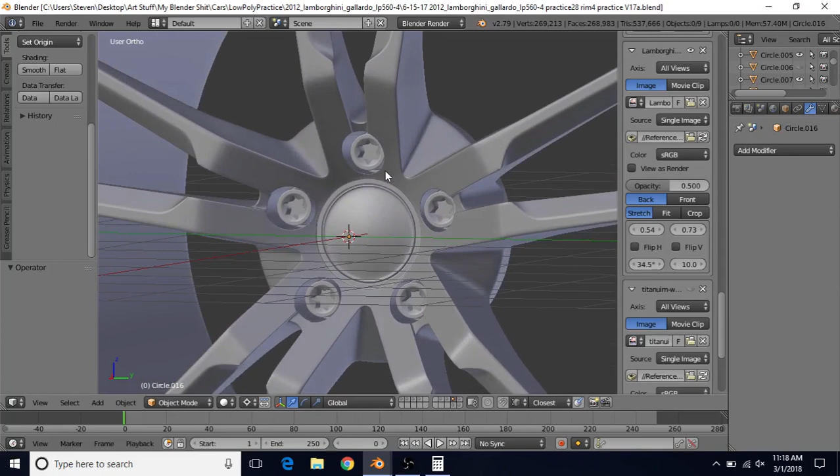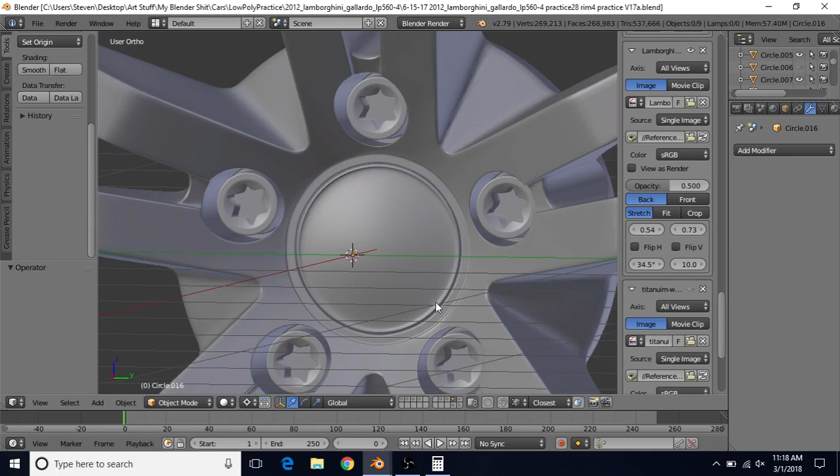We're going to be making the bolts and adding them to our rim just as I've done here. You'll notice that the bolt shape in the center is a bit of a custom shape. I believe this is probably more specific to these Lamborghini bolts, possibly some other cars use similar bolts, but these are an interesting shape you don't see all the time.

So let's take a look at the bolt itself. This is the general bolt shape right here. You'll see a link in the description, or a few links possibly, that show you better angles of what this actually looks like in the real world.

Another interesting thing to be aware of with this bolt is it's actually a two-piece bolt. I believe this is a newer style bolt where this part right here - if I select this part and change it - actually on the real thing is loose. It can slide up and down, and you may see that in some of the pictures as well, showing that this part can move. So these two pieces in the real world are actually separate, and we're going to model them that way.

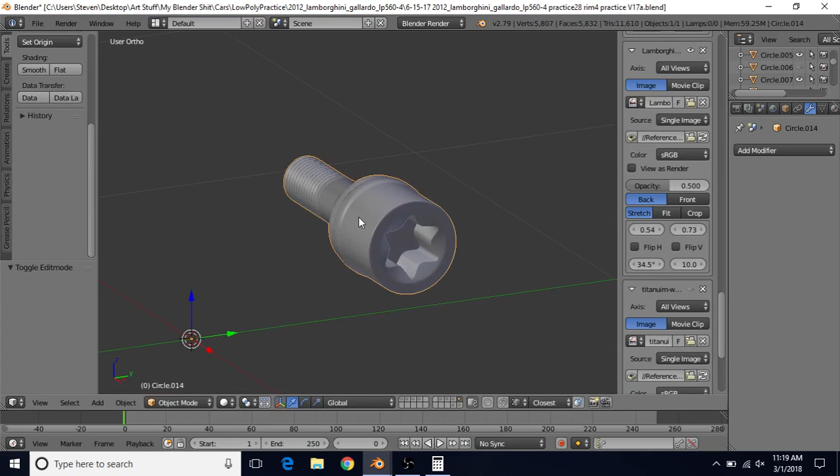So this will be my reference for this video. You can use the references linked in the description if you'd like to try to make an accurate representation of this bolt.

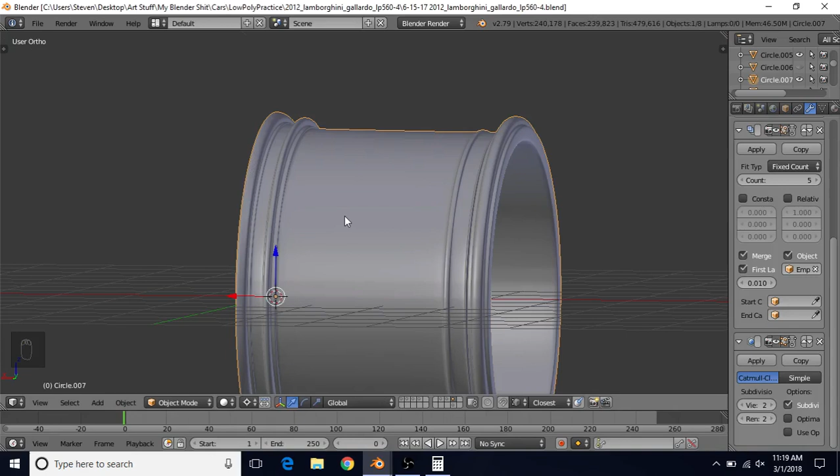So we're going to go back to our Blender file here, and we're going to go to a new layer, so just left click on this layer.

I'm going to press T to open up the tools menu, go up here, then go to create, and we're going to create a circle. Just make sure your cursor is in the center, so do Shift S, cursor to center, and we're going to create a circle. We're going to do 12 vertices and then press enter.

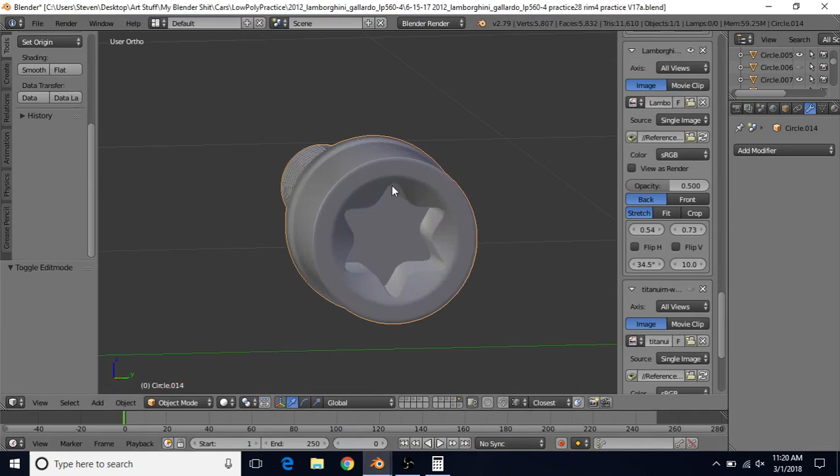The reason we're doing 12 in this case is because we have 6 points on this star shape, and we have 6 points that are on the inner part of the star shape. So 6 and 6 is 12, and that's the reason we're starting with a shape of 12.

So we're going to press tab to go into edit mode, R Y 90, and press enter. We can do 3 for side view, and S to scale this down.

You can try to make it similar to the size of this bolt here, but just make sure you switch to median point when you're scaling so that you don't get distortion of your circle. So I'm just going to try to match the size roughly - we can always scale this later. This is probably a decent size for now for the beginning of our bolt here.

Next thing to do is switch to vertex select. We want to create this star shape, but actually first, before we do that, we're going to create this outer shape first.

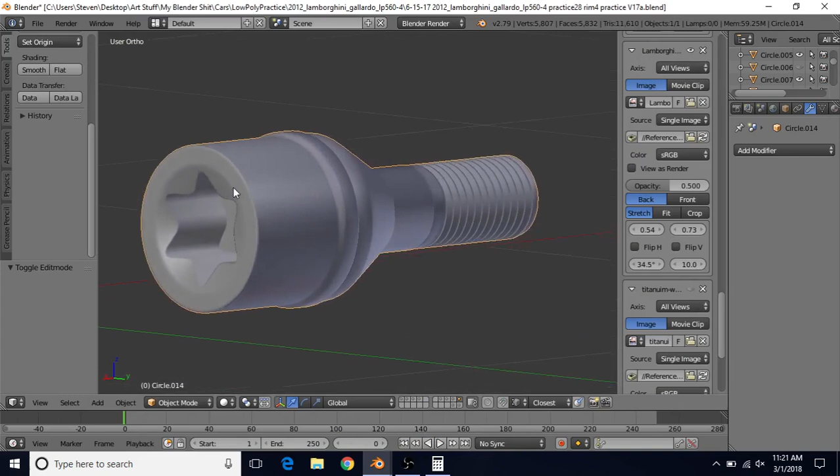One thing you'll notice about this in the pictures as well as in this reference is that there's kind of this inward angle on this star-shaped part where it actually goes in like this.

And we're going to use a shrink wrap modifier to create that. So we're going to start by making this shape, and we're going to make this bowl shape, which is going to be used to help us with the shrink wrap modifier.

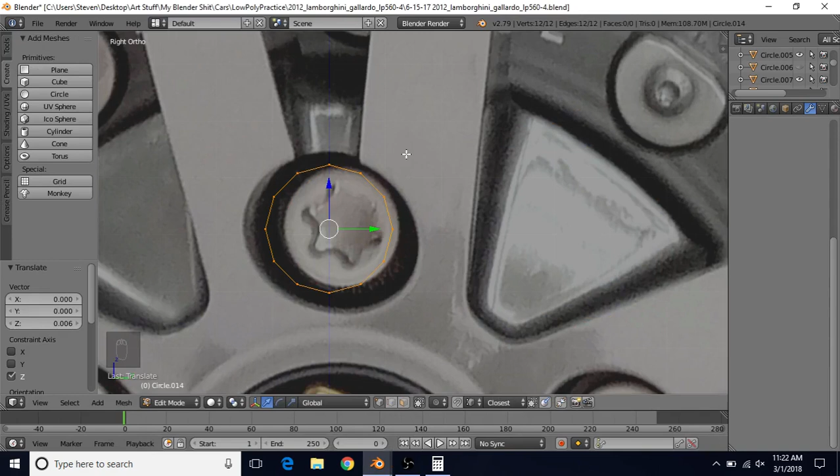So we're going to do E to extrude, right click to cancel, and I'm actually going to bring this one out. So I'm going to do S to scale this out, and we can scale this in more later. Maybe I'm just going to do A twice and scale this in a little actually.

And then we'll Alt right click on this, and then do E to extrude, right click to cancel, S to scale this down. I'm going to do period on the number pad to focus in on this, and then just bring this back some, S to scale it down some more, bring it back some more, scale it down a bit more.

This is going to be the angle for how far back this is actually going to go. This is going to be our reference angle, so the further back you bring it, the farther back that little part's going to go right here, and the closer you bring it, the closer it's going to be. So you just kind of want to try to get it to where you think it's going to be the appropriate shape. Something like this is probably going to be fine.

And I believe another thing I did on this other one was I just did Control R, left click and bring this in. Again, that's going to be a supporting edge loop, so that when we add subdivisions, this is going to look fine once we add subdivisions in. And we could do the same on the outside, but for now we're actually just going to leave it. So I'm just going to leave the outside the way it is.

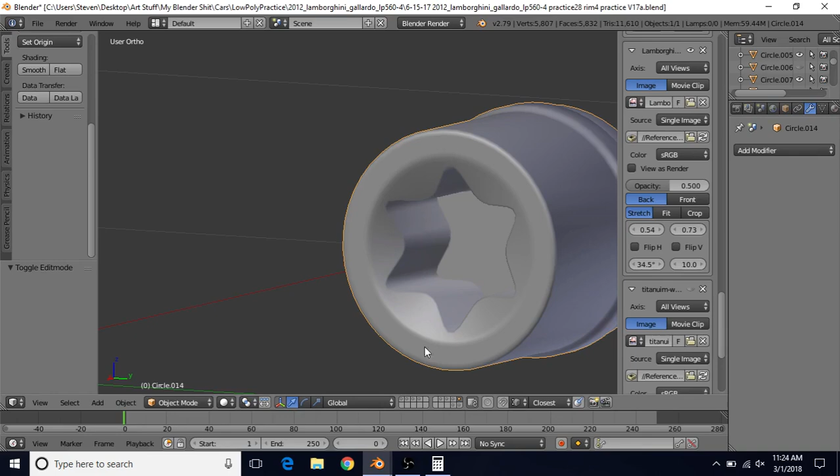So we're going to press A to select this, and what we want to do is we want these points to be the furthest points, and then we want these in between points to be pulled in towards the center of the circle so that we make this star shape. So we want to select essentially every other point and then scale them in so we get that star shape. So what I'm going to do is hold Shift, right click to deselect, and then right click to select. That'll make sure this is the active point. Which point is the active point is going to make a difference in this next command.

So if we do select, checker deselect, you see this point is still selected and then it deselects the next point. If you had a different point as your selected point, which is the one that's in white, when you do select, checker deselect, you notice this point is selected and this one's not selected. So it will make a difference which point is in white. So you want to make sure that this one's in white and then do select, checker deselect, and then you can do S to scale this in. And this is going to create that star shape. And you can bring it in probably about this far.

And at this point, if you want, you can do Tab and then right click to select this and H to hide it, so you can get a better look at the star shape on this. This isn't the best reference, but there are other references in the description, so just check out those references. But we can see that it's a beveled star shape, so we need to add bevels to these vertices here. So we're going to do Tab to go into edit mode, and we're going to do Control, Shift, and B. And we're going to mouse wheel up twice until we have 4 vertices. And we'll do probably a bevel like this, and then left click.

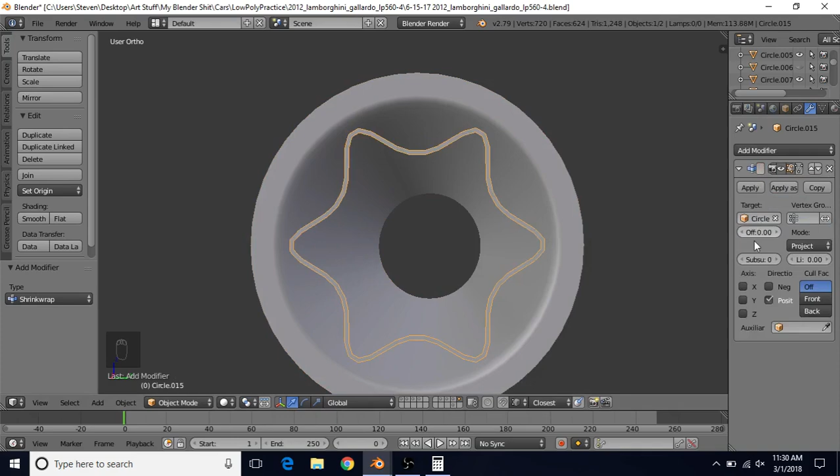Now what we want to do in order to have the shrink wrap modifier use that subdivision, we're just going to apply this modifier. So right click on this part and then click apply, and then select this part, add modifier, shrink wrap, left click on the eyedropper for the target, left click on the circle, change this to project, turn on the negative, and everything should be looking like this, where it's all snapped nice and tight up against this piece, and then you can click apply.

Now what we're going to do is select this part and we're going to tab into edit mode. We actually want to get rid of all this stuff right here. It's all unnecessary stuff. The only thing we really want to keep is this nice beveled corner right here. Everything else can go away. So we can alt right click on this, press delete and choose vertices. Select a vertex here, do Control L, delete and choose vertices.

Then we can press tab to go to object mode, select this piece, shift select this piece, Control J to join them together. We can press tab to go to edit mode. Now what we want to do is to join these pieces to this circle around here. But if I do 3 for side view, one thing you'll kind of notice is that these two are not lined up very well with this vertex, and I'll just show you what I mean real quick by joining these two together. This is just an example, you don't have to follow along at this point.

So what's going to happen is you're going to end up with these stretched quads right here. It still kind of works, there's still quads, but it's not really the ideal situation. So what we want to do is actually rotate this around a bit so it's going to make a better quad, and you'll see what I mean when we actually do it. So we're going to select the vertex here and we're going to do Control L.

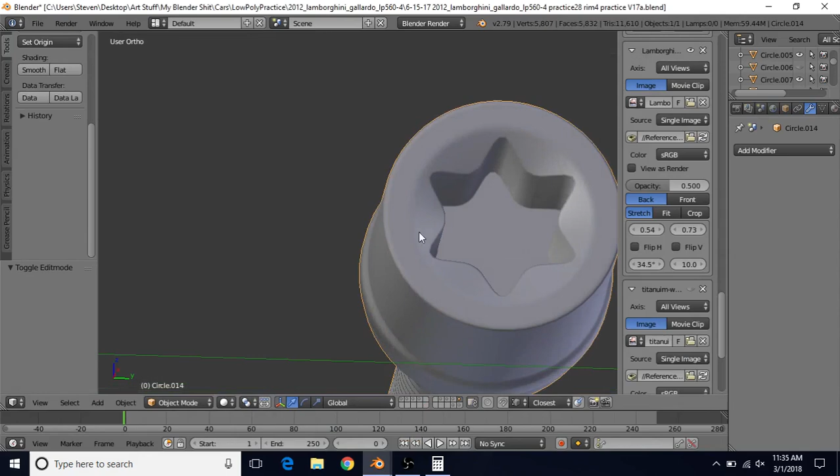So we're going to Alt right click on this inner part. We're going to do E to extrude, right click to cancel, and bring this back. That's going to create that inward part for the piece that would be put in here to tighten and loosen the bolt. Just bring it back as far as you feel is necessary. Probably something like that is going to be appropriate.

And another thing I did was try to make some nice quads on this inner part here, which is a little bit tricky, but I think we can manage to do it here. So first we're going to press Shift H. That's going to hide everything except for these newly created vertices. We're going to do 3 for side view.

And we want to make quads out of these, so we're going to select these 4 at the end, and we're going to press F, and we're just going to do that all the way around. You can also just select one, hold Control, select this one, and then press F. So select, Control select, and then press F. Once that's done, we're going to create a couple more faces. So we're going to select these 2 and then press F twice. Select these 2, press F twice, and then repeat that all the way around.

Now we're going to select these 4 and press F. Select these 4 and press F. Select these 4 and press F. And we actually could have just selected these 2 and pressed F. That would have worked as well. So either way works just fine. And then you can select these here in the center, these 4, and press F. And you now have all quads for your topology.

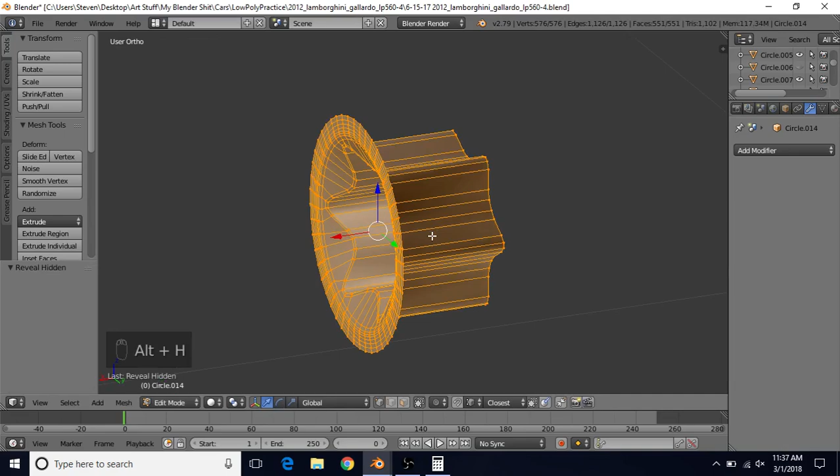So to make it a flat surface, we're going to do S, X, and then 0 to flatten it out on the x-axis, and press enter. So S to scale, X for the x-axis, 0, and then press enter. And then do Alt-H to unhide, A to deselect, and we can now see that we have that nice star shape with a nice bottom to it. Everything's looking good.

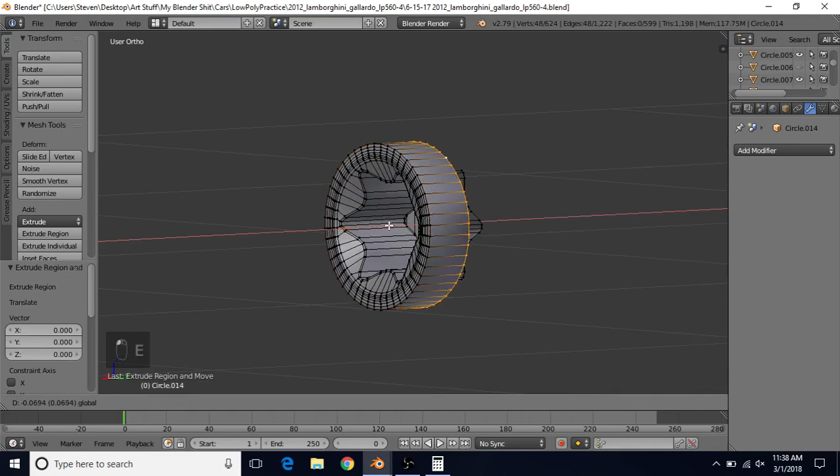Now we're going to start creating this part going down to this part. So we're just going to go into edit mode, Alt right click on the outer edge, and we can do E to extrude, right click to cancel, and just bring this back. And we're going to try to match the same distance as this. Again, you can use the real pictures if you would like to compare it to the real pictures instead.

And then we're going to bring it back a little bit further. So we're going to do E to extrude, right click to cancel, bring it back a little bit further. And then I'm going to scale it out. So we're going to do S to scale it out a bit.

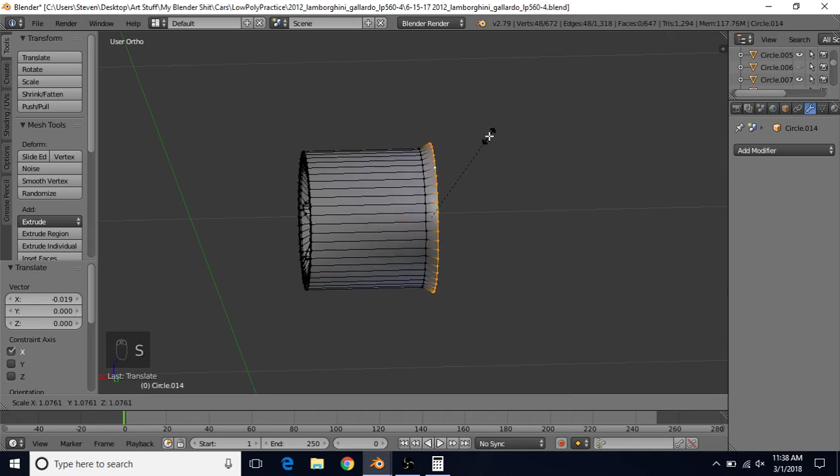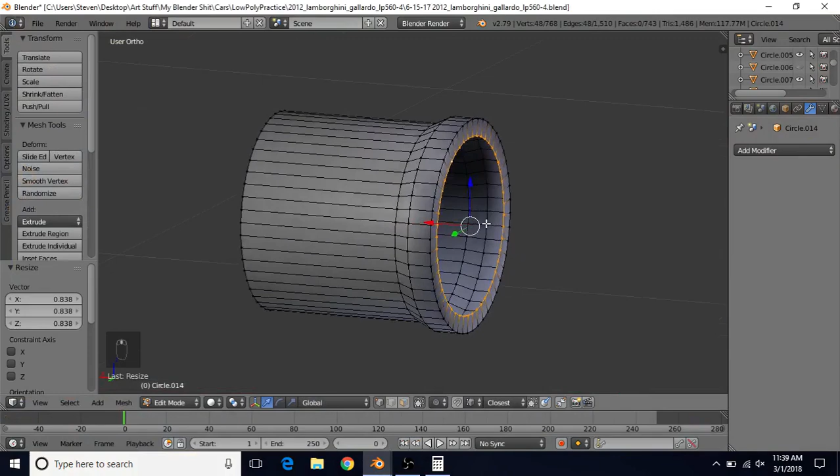Not too much. Then we want to bring it back some more, and then scale it back in some more. So we're going to do E to extrude, right click to cancel, bring it back some more. Maybe a little bit less than that. E to extrude, right click to cancel, scale this down some. I'm going to take a quick look at how I did this. Okay, so it gets scaled down quite a bit here, so we're just going to scale this down quite a bit.

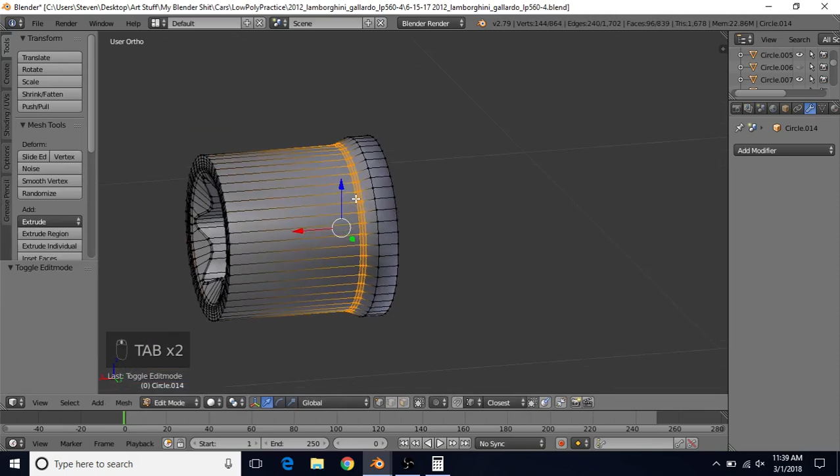So that looks good for that, but you'll notice that we don't have the best shading here. So in order to improve that, we can add in some bevels. So we can alt right click, do Control B, mouse wheel up once, and that'll make that look a little nicer. Then we can do the same on these, alt right click, change it to edge select, alt and shift right click, Control B, mouse wheel up once, do some bevels here as well. So now we're starting to get that shape. It looks pretty much similar to this.

The next thing to do would be to make this piece. It's a little easier to just do this piece first. And in order to make this, I just used an add-on to make this really simple. So we're going to go to File, User Preferences. We're going to click on Add-ons. And we're going to type in the search box Bolt. And we're going to enable, put a check mark on Bolt Factory, and then you can close this.

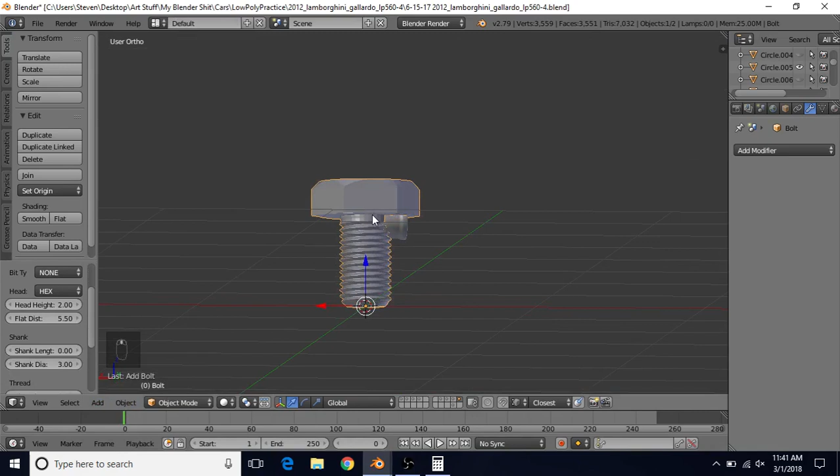Now you can do Shift A to add a new object, and then go to Mesh, and then go down to Bolt to add in the bolt. You also could have gone to Add, Mesh, and chosen Bolt. Would have done the same thing. So now we have a bunch of settings that we can adjust here. And one thing I noticed about the amount of rings that they have on the real thing is there's approximately 13 of them. So this actually has 13 of them by default, it looks like, so that's pretty good. It worked out pretty well.

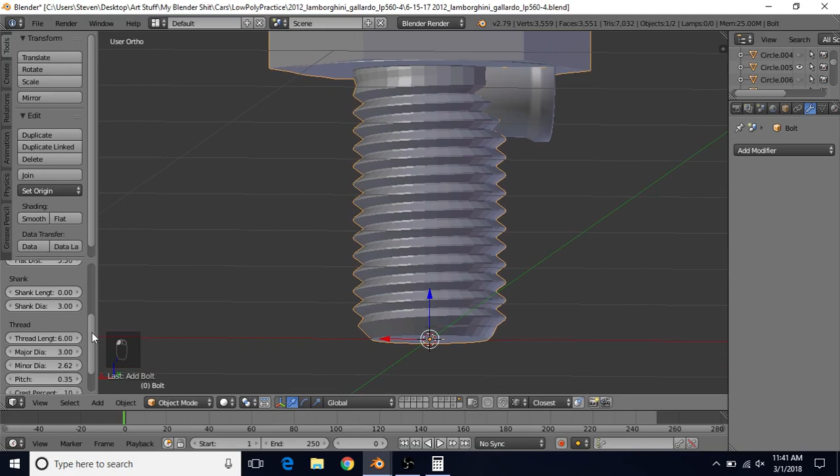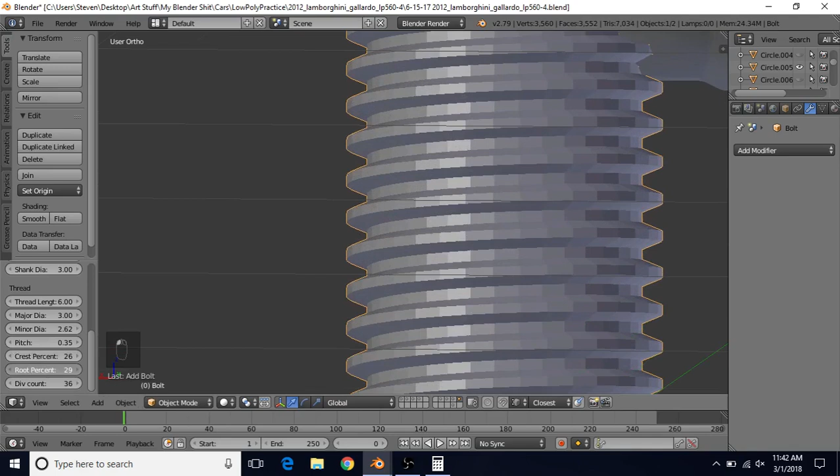Another thing is that these points here, or this surface here, is a little bit wider, and in order to change that, it's this crest percent here. So just hold shift and left click and you can change the crest percent, make it a little bit wider here, something similar to that, maybe a little bit less. And there's also more space in between them. So if we hold shift and left click, we can create more space in between them with this root percent. Something like that seems to be relatively appropriate. As usual, just look at the reference pictures and make your own decision as far as how much space there should be on both of these values.

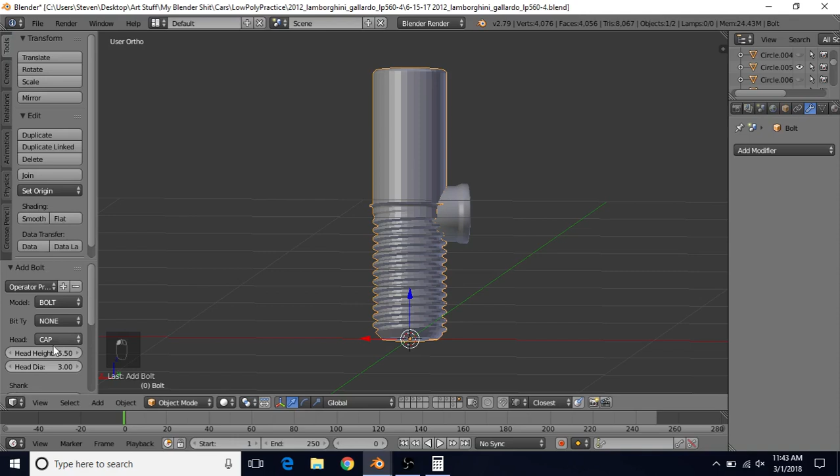And then to simplify things, we're going to go back to the top here and change the head value from hex to cap. And then we're pretty much done with this object here. The next thing we're going to do, and this should be the last thing that you do, because once you press this, you're going to lose all of these settings. So once you're done with all these settings, just click on Smooth. That'll get rid of these settings.

Tab into edit mode. We actually don't need anything on the top here. And we also don't need most of the stuff down here either. So what we can do is just determine where we want this to stop. So maybe here is good, or a little bit further. Maybe we'll get rid of this one. So I'm going to alt right click on this, and we'll do delete and choose vertices. I think that should be fine. It looks like that'll be fine.

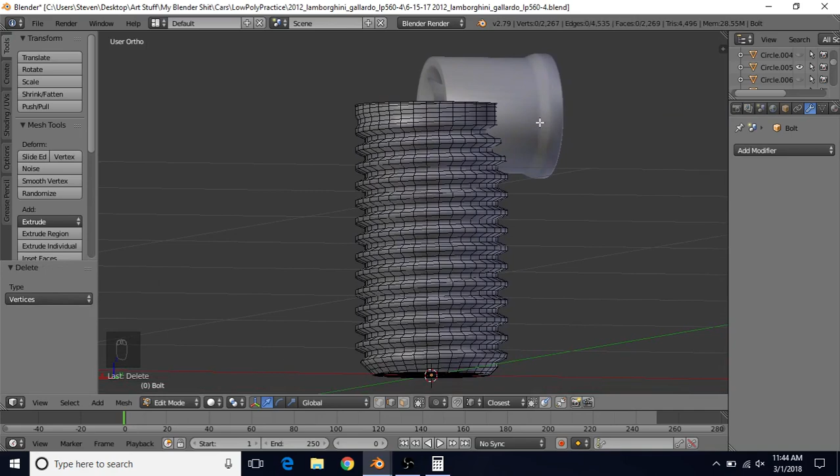Then select one of the edges up here, do Control L, and then do delete and choose vertices. We only need this much of it because we've already created the top of our bolt here. We didn't need the one that they gave us. We just needed the bottom and the spiral thing. So we should be all set with this.

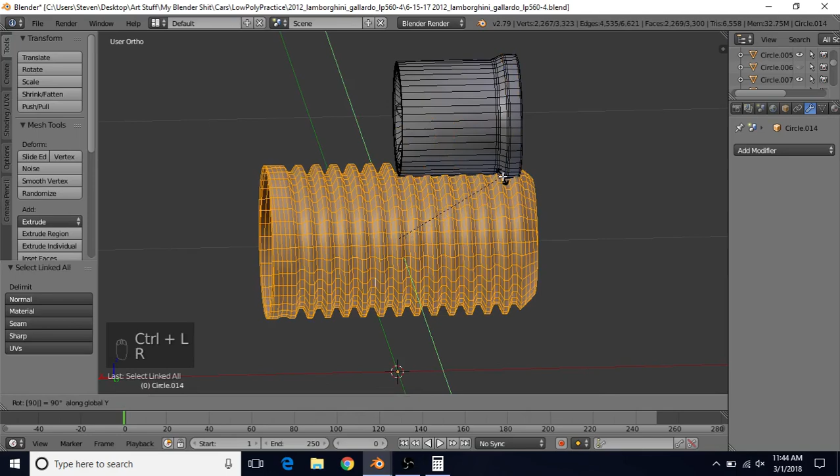So now we can tab into object mode, shift right click to select this, do Control J to join them together, tab into edit mode, select an edge here, do Control L, then do R, Y, and 90, press enter, S to scale this down to whatever scale you believe you should have it at. And we want this to be nice and perfectly centered here.

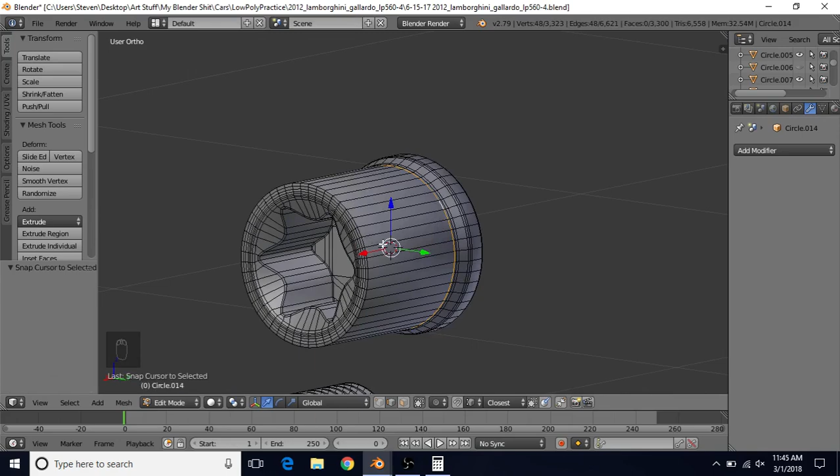In order to do that, what we're going to do is Alt right click on pretty much any of these edges here, then do Shift S, cursor to selected. That's going to put the cursor right in the center of all these edges and things. Select an edge on this, do Control L, Shift S, selection to cursor with the offset option.

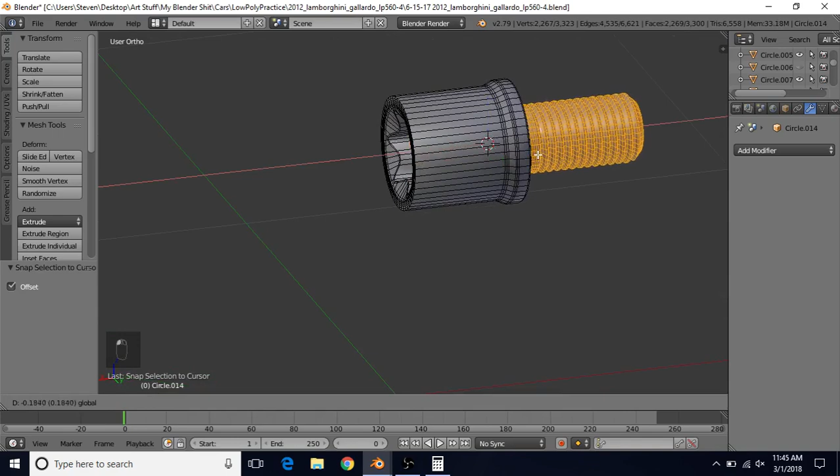So we're going to click on this, and that's going to center it perfectly, but we need to move it back some. So we're going to move it back to maybe about here or so, maybe a bit further depending on your reference right here. Just bring it back to wherever you think it needs to be.

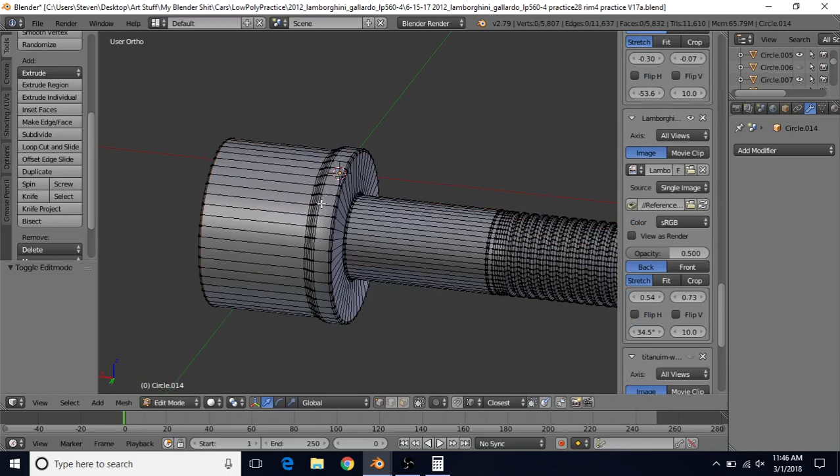Then we can Alt right click on the very top edge loop to select it, because we want to start bringing this in this direction. And this part actually goes all the way to the top and connects to the top part, because remember, as I said before, this piece is actually separate and it can slide up and down. It's actually not connected to the top part or the bolt itself.

So this is that second piece, and the rest of this that you see here is all one piece. So this needs to go all the way up to the top and connect to this outer loop here. So we're going to do that now. We're going to go back. With this selected, we're going to do E to extrude, right click to cancel, bring this forward.

And we can actually get rid of this edge loop. But first I'm just going to Alt right click and scale it out some. And then Alt right click, G, and then X. Hold Control and snap it to this very outer point. You want to make sure you get one of these outer points here to make sure it has the correct X value. So do G, then X, hold Control, and snap it to this point here.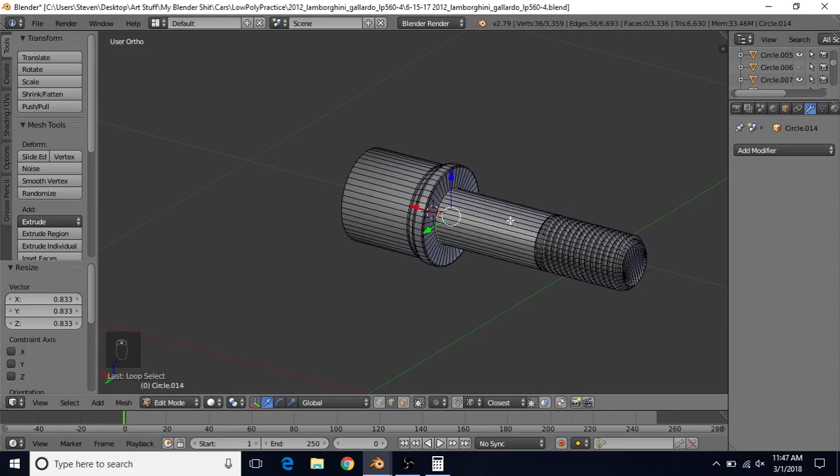And the reason I left this inner loop is I kind of wanted to compare how the rotation was. So again, we kind of have a rotational issue where this is like halfway in between. And the other thing I actually forgot to do was make sure that this had the same number of edges or vertices. See, this has 36 vertices. Fortunately, this is pretty easy to edit, so I'm just going to have to add in a new bolt.

So I'm going to do Control L, delete, choose vertices. Then I'm going to do Shift A, add a new bolt. It's all the same stuff we just did before. And hopefully it actually kept the settings that I had. It looks like it did. So the only thing I have to change is the division count. So at the bottom, change this to 48. And that should be it.

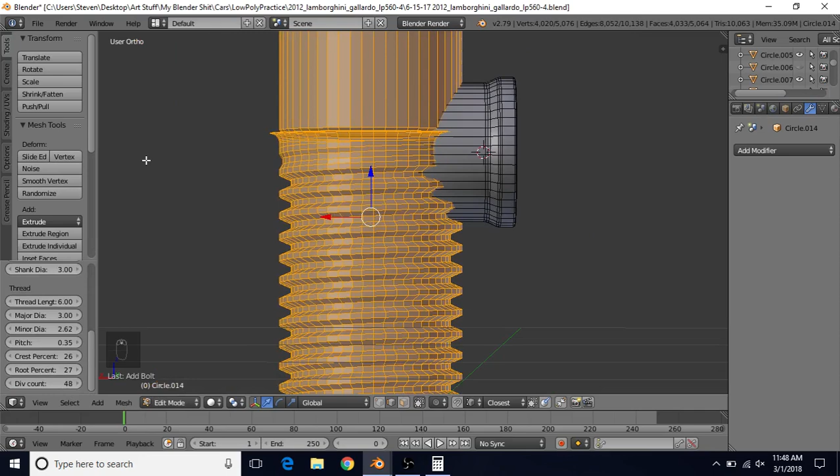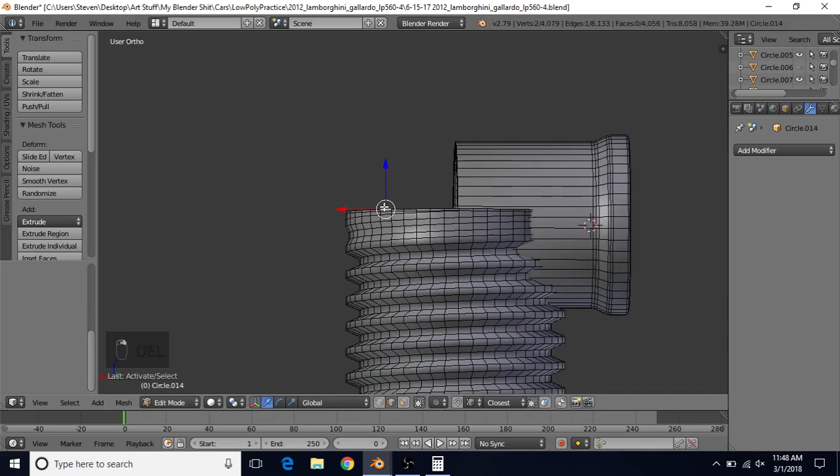Just turn smooth shading on. So do Tab, turn on smooth shading, Tab again. And we will Alt right click on this one, I believe we did, then delete vertices, select Control L, delete vertices, and we're back to where we were. Select Control L, R, Y, then 90, press Enter,

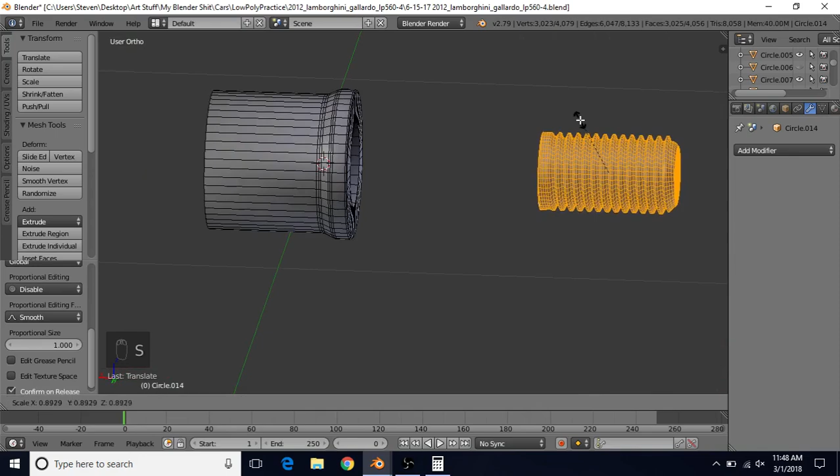and do Shift S, selection to cursor, scale it down, bring it back, all the same stuff we did before. And that's probably going to be good for that. So we're just going to Alt right click on the outer edge, E to extrude, right click to cancel, G, then X, hold Control, snap it here.

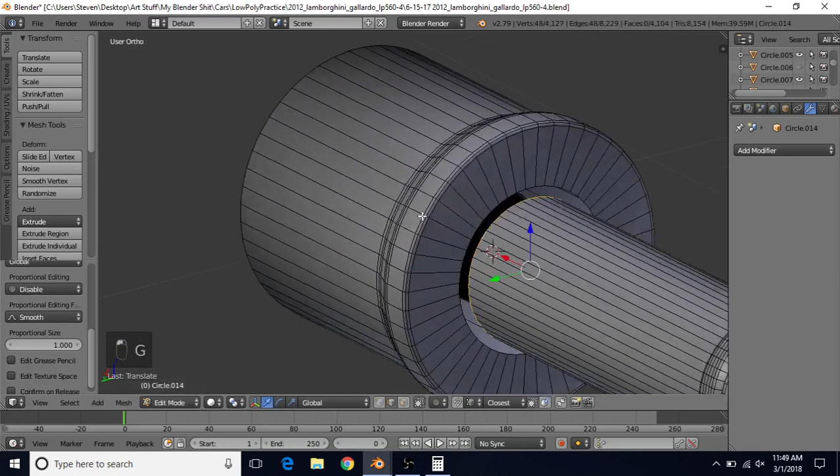And now we're going to look at the positioning again. It looks like, yeah, it's about halfway. So we're going to do Control L. We're going to do 3 to go to side view, and Z for wireframe. And yeah, it looks like it's probably about halfway. So we're going to do R, then Control V to paste. The value is 3.75, so you can just enter that in if you want, and then press the Enter key.

And it doesn't look like it did a whole lot, but it looks like things are more lined up if you look at these here. So now what we're going to do is Alt right click on this and then press Delete and choose vertices, then Alt right click on this and Alt and Shift right click on this.

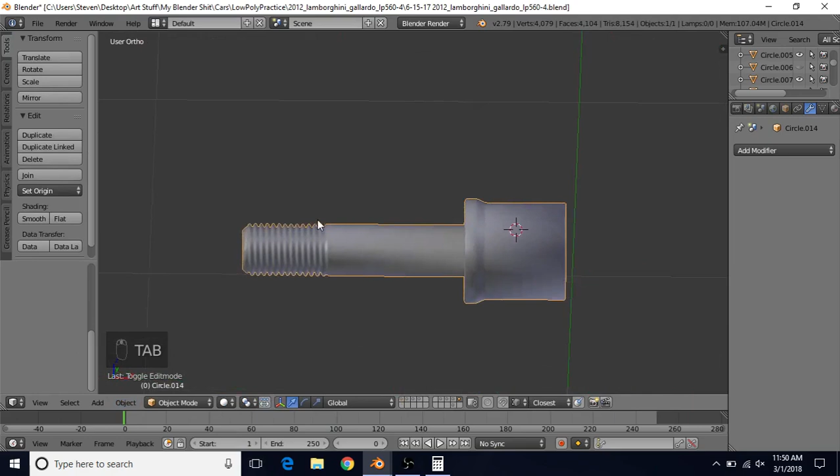Again, we're going to do bridge edge loops, so if you have the hotkey, do Shift and Q. Otherwise, go to Mesh, Edges, Bridge Edge Loops, and do it that way. So now we have this piece here, which looks a bit too long, so I'm actually going to go to vertex select, Z for wireframe, B to box select. Select these and bring this back a little bit.

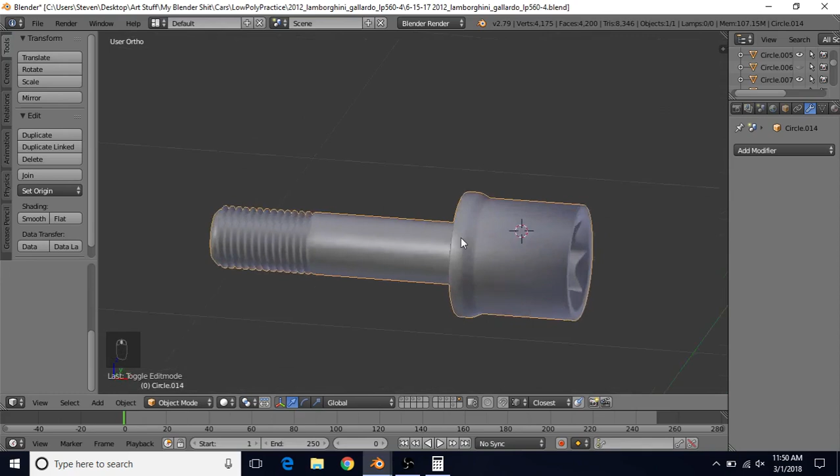And that should be fine. Again, to help the shading here, we're going to add a bevel. So we're going to Alt right click, Control B, mouse wheel up once, and then left click. And we're now starting to get some better shading. We're going along pretty good, so I'm just going to save this, go to File and Save.

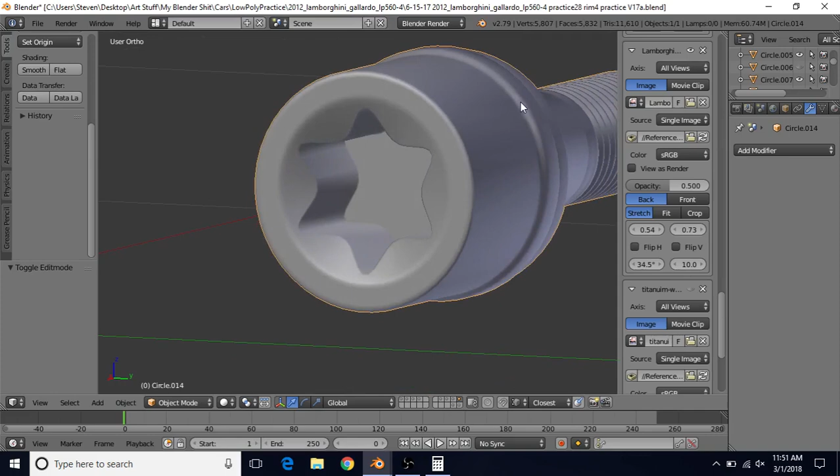For this last piece here, it actually has the same radius as this part here. Like you see, this part gets scaled further out, but this part gets scaled back in again to be the same radius as this. So we can use this radius to create this radius for this part.

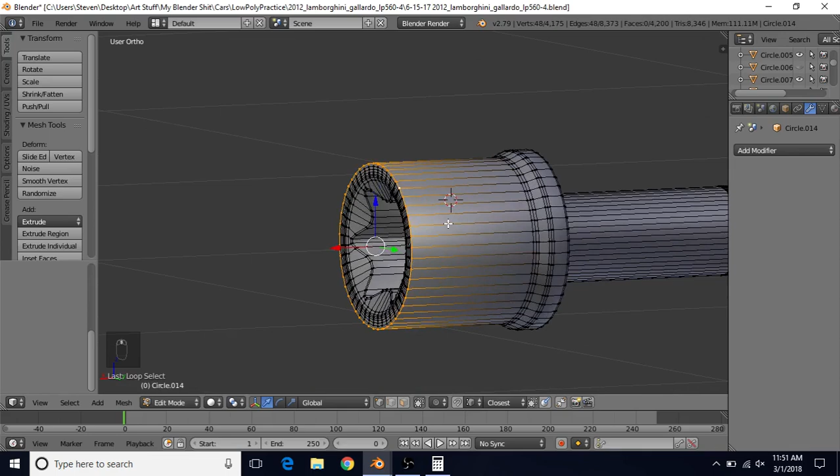So in order to do that, we're just going to tab into edit mode, and we're going to Alt right click on this edge here, this outer edge. Shift D to duplicate, right click to cancel, bring it back. It's fine if it's a little bit further back, we can always move it forward again later. Then do E to extrude, right click to cancel, bring this back. Try to create a similar distance here. So that's probably too much. I want to do about this.

Then we're just going to extrude and scale this in. So we're going to do E to extrude, right click to cancel, bring this back. S to scale it in. You want to scale it in until it's just a little bit bigger than this bolt part. And then that will be fine.

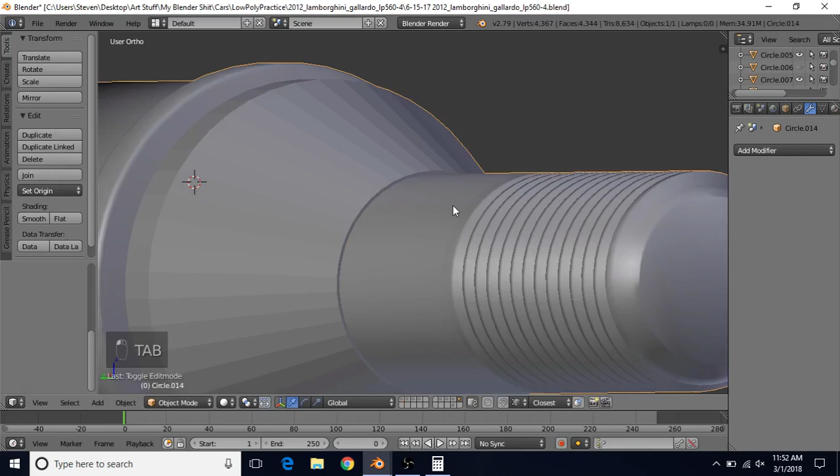Then we're going to do E to extrude, right click to cancel, and then finally scale it in to be almost touching that part. So if we go back to object mode and turn on smooth shading, we still have to do the bevels to make this look better, but we have the basic shape of this at this point.

Then we can do E to extrude, right click to cancel, bring it back on the x-axis, hold Control and snap it to this vertex or any of these vertices on this point. Then do Alt and Shift right click to select these two edge loops, Shift and Q, and that will bridge edge loops as usual.

We can do Control L, then Shift H, so we only have this piece. And now we just have to add in some bevels. So we can go to edge select, and then Alt right click, Alt and Shift right click, and do Control B, mouse wheel up once.

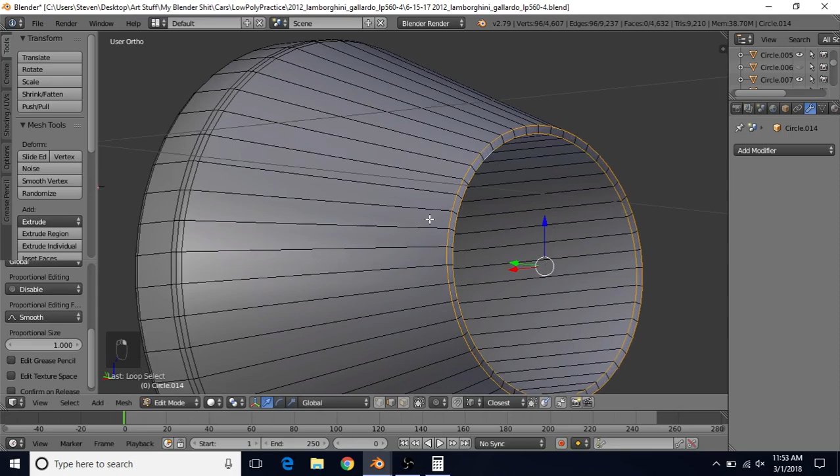Do the same thing here. You can Alt right click, Alt and Shift right click, and if you want to make this one a little bigger, you can do Alt right click, then S to scale this out a little bit more. Then you can Alt and Shift right click, Alt and Shift right click, and now we can do Control B, mouse wheel up once, left click, and now we have that nice shape right here, as well as the nice bevels.

So if we do Alt H to unhide everything, select an edge here, do Control L, and if we do 1 for front view, we can slide this up by just dragging it on the x-axis and bring it up nice and close so it looks like it's right up against this.

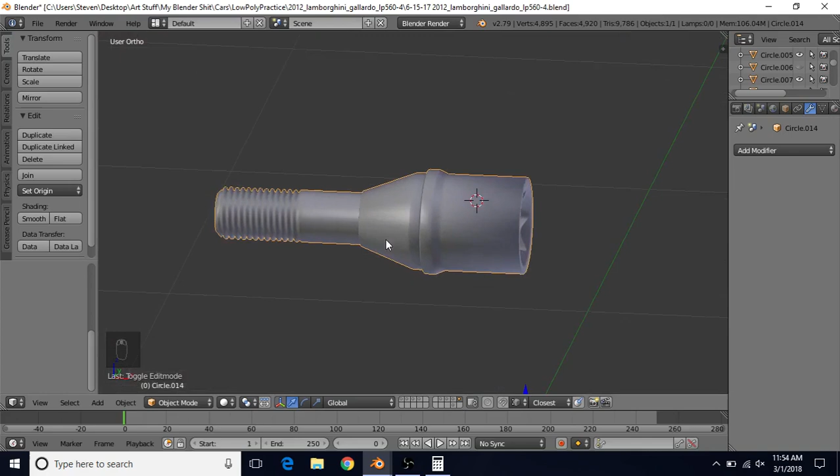And it does look like this bolt part's probably a bit longer than this one, even though this one's pretty close to the reference as far as I can tell. On the actual rim here, it just didn't seem like it went back far enough. Maybe I'm wrong, but I don't think it goes back far enough, so I'm probably just going to leave this one a little bit longer, because I think it's probably going to have to be a little longer for our rim anyway. So that's going to be fine.

Another detail that I added on this, which is actually on the real thing, is these very, very small inward extrusions, and then another really, really small one. If you want to make it actually realistic, you'd probably want to add these in. So I guess I can show you how I did that. I'm just going to use this as a reference because I kind of need a reference.

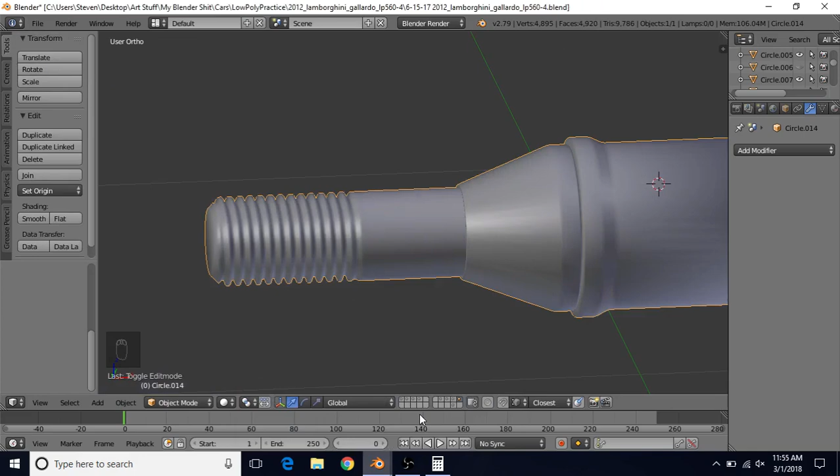So it's a little bit further back is where it starts. So if we tab into edit mode, do Control R, left click, and bring this down. It's probably about here where it starts. So I'm going to left click to add in an edge loop here.

Then it gets extruded and brought in a little bit. So we're going to switch to vertex select. And we're going to do Control R, left click, and drag this all the way till it's touching these other vertices. Then left click.

We're going to have to scale down this bolt a little bit so that it matches the size of this newly scaled down part. So what we're going to do is 1 for front view, Z for wireframe, B to box select, and select all the vertices to the left of these vertices.

Then you can change your view if you want, and then do S, Shift and X to exclude the x-axis. Scale this down slightly, very, very slightly, because these little details don't get scaled down very much at all. You can get out a wireframe if you want and get a closer view, and do S, Shift and X, and make sure this is really small.

Then we're going to do the same for the next one. We're actually going to do Control R, left click, and bring this into about here. Left click again. That's going to create this little band that goes right here. And then there's a very, very small extrusion and scale down again.

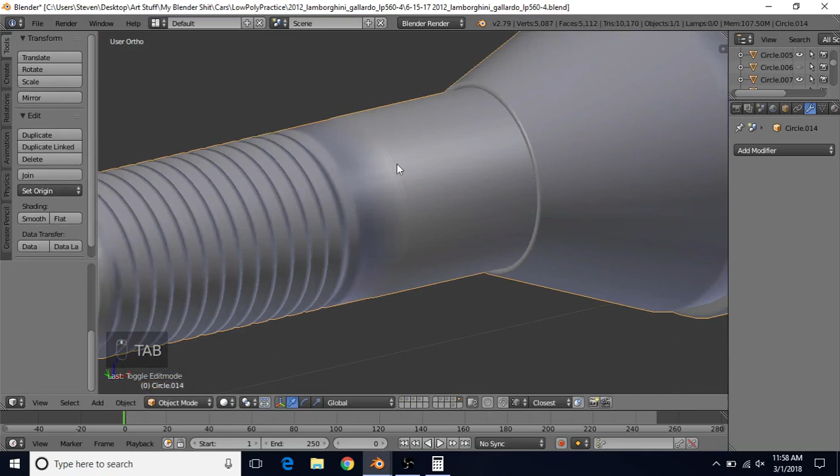Then do S, Shift and X, and scale this down very slightly so that we have this. We still have to add the bevels in here to actually make it look like the way it's supposed to be. And I may want to just scale this down slightly more just to make sure that it's visible here.

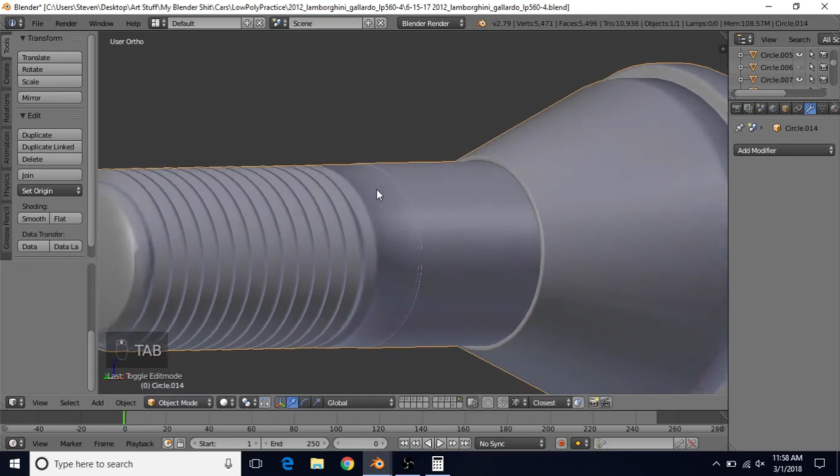So now we're going to switch to edge select. We can Alt right click, Alt and Shift right click on all of these. Do Control B, mouse wheel up once, and do a very small bevel on these edges, then left click, and now we should see that very small detail that's added into this bolt here.

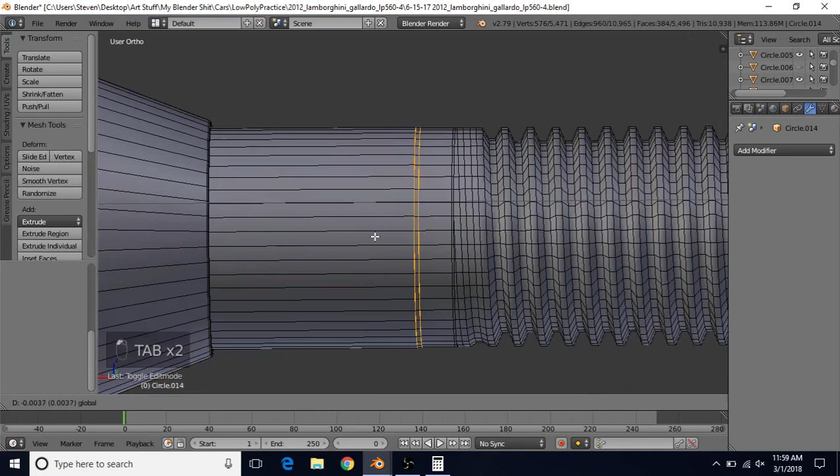If you want to adjust these, they're already selected right now, so what we could do is just move them up and down on the x-axis, and you can put these pretty much wherever you want. So if you think it should be closer to the bolt area or the spiral area, the screw area, whatever you want to call it, you can just bring them closer on the x-axis and it will be nice and close to that area. You can also move them away if you'd like.

So that is the basics of the bolt. There's one more thing I wanted to cover. You can see the shading here is not the best. You can kind of see these lines right here.

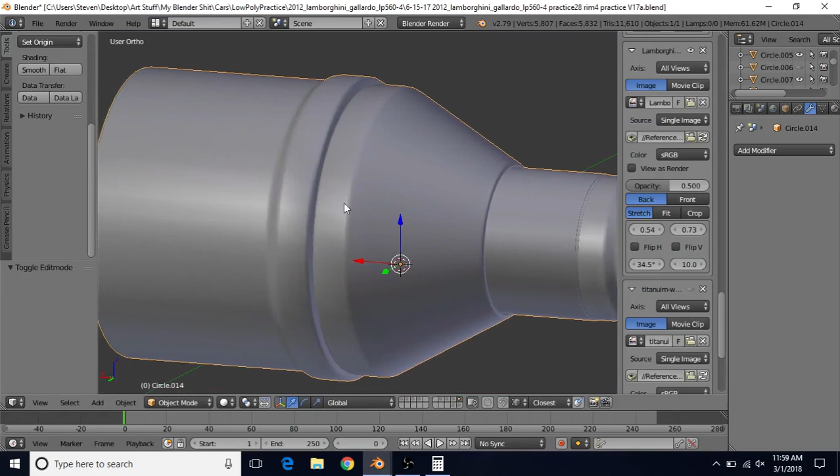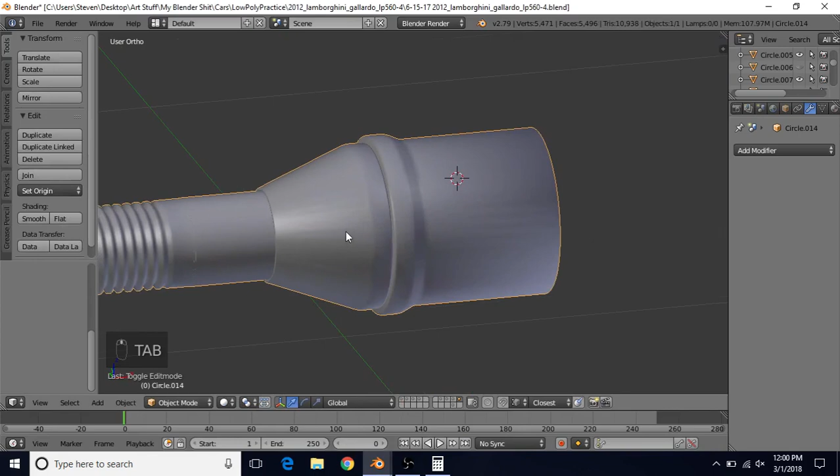And on this other one, I pretty much corrected it for the most part. The real reason we're getting those lines is actually because on this model, our current model, we have a lot of distance between these two edge loops and less distance between all the rest of the edge loops, and that's causing this awkward shading here.

So if we just add in more edge loops, even though it's going to increase the vertex count, it's actually going to help it look a lot smoother and look a lot nicer.

So all we really have to do to get rid of all this streaky line stuff is do Control R, mouse wheel up until you're happy. You can do 5 or 6, probably 5 is good, then left click, right click. You'll see that streakiness is actually gone for the most part, but it's now down here a little bit.

So if we go back to edit mode and do Control R, then left click and right click, it's now reducing the area where the streakiness is. You can just continue doing that, adding in edge loops until it's pretty much gone. And you'll see we have now a much nicer result.

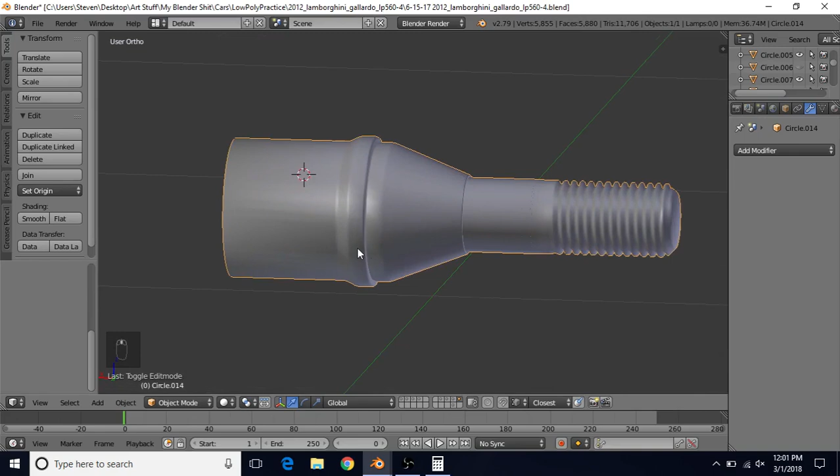It's nice clean shading here. It looks a lot more natural. And you can compare it to this where you still see the lines. This one looks a lot nicer now. And you can do the same in this area if you want to.

But before I do that, I think I actually want to Alt right click and do Control B on this edge, mouse wheel up once, and then left click, because I forgot to add a bevel on that outer edge, and I just wanted to make sure that I added in the bevel on that.

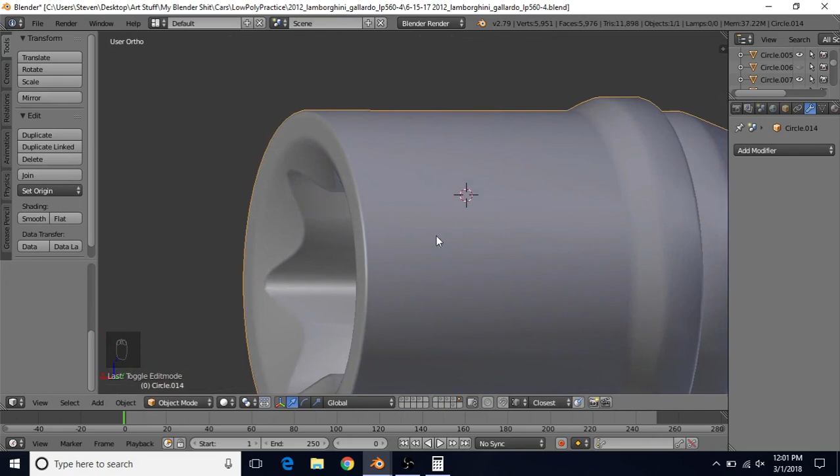So now to get rid of this streakiness, you can do the same thing, Control R, mouse wheel up maybe 7 times, left click, right click. That just creates similar spacing here to the spacing here to the spacing here.

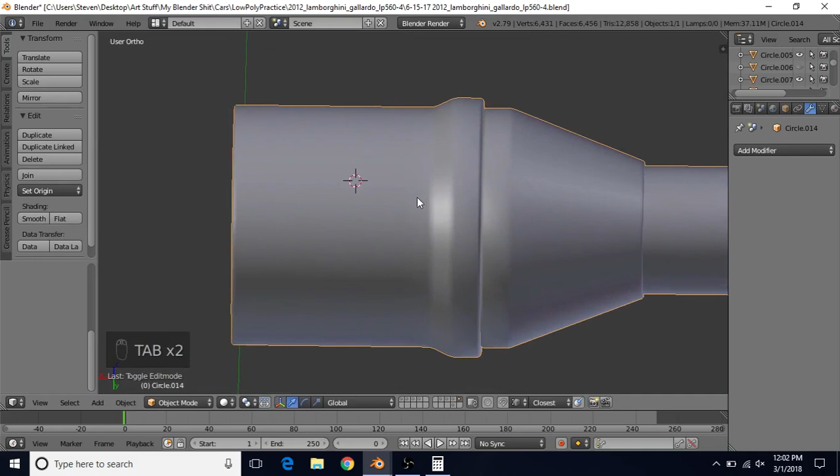Again you kind of get the streakiness at the top. If you want, just add in a couple more edge loops at the top and that will go away. You could do the same at the bottom, but it actually doesn't look bad there, so you don't have to unless you feel it's appropriate. I think this looks pretty good, so I'm just going to save it real quick.

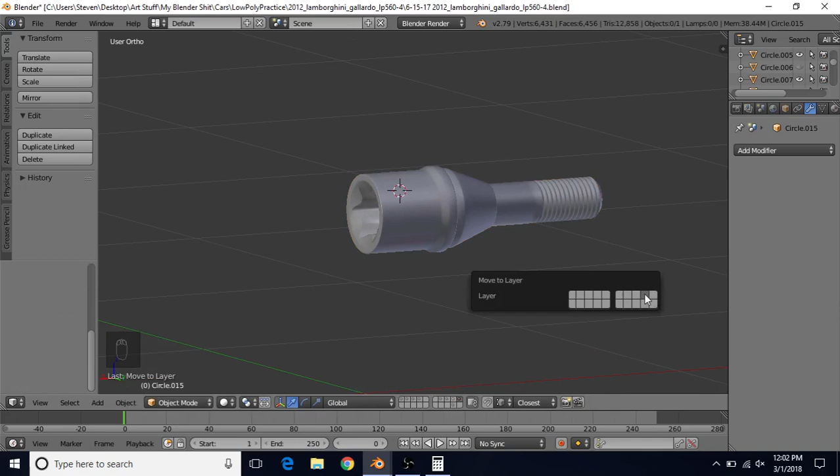The last step is to add this into our car model. To do that, we do Shift D to duplicate, right click to cancel, press M to move it to a new layer, select the layer that has our rim, and left click on that layer to go there. You see our bolt is now here.

We can tab into edit mode, press A twice, 3 to go to side view, and we want to position this perfectly in the center of these other circles. You can see it's not in the right position on the Z-axis here, so we'll have to use the 3D cursor again.

We go into object mode by pressing tab, select the rim by right clicking it, press tab, and then we can alt right click on any of these edge loops, do Shift S, and cursor to selected. Because this is actually a mirrored circle, it's going to put the cursor a little bit away from the center. So what we can do is press N, or left click on this to bring up this panel here.

We bring this up until you see 3D cursor, and we're going to change the Y position. Left click and change this to 0, then press enter. That'll put it perfectly zeroed on the Y axis.

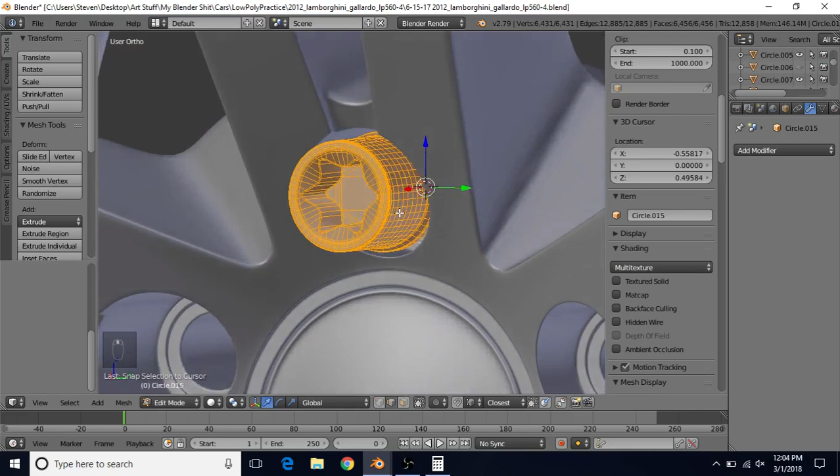Now we can press tab, right click to select our bolt, press tab, then do Shift S, selection to cursor with an offset. You'll see it's now very nicely all the way around, lined up with the rest of the circle that is part of the rim.

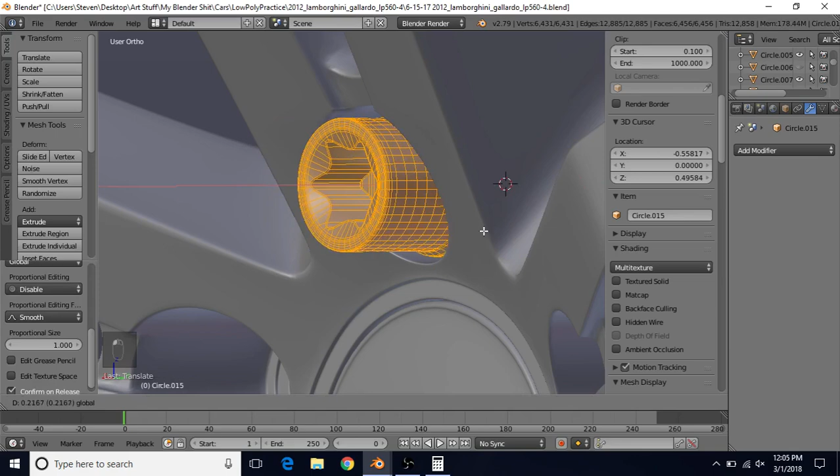In order to position this properly, we're going to grab it on the x-axis and snap it to one of these bottom points here, holding control. Actually, I'm going to bring this back first on the x-axis, then grab it on the x-axis, hold control, and snap it here.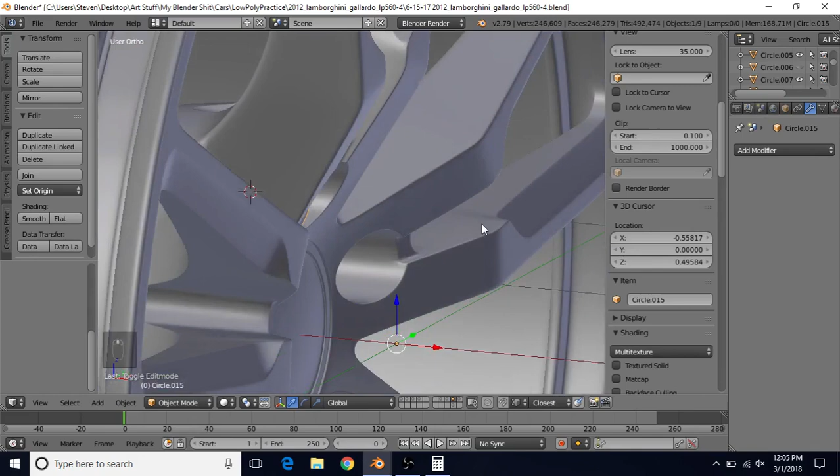When I was looking at reference photos, the bottom of this circle and the bottom of this bolt are pretty much lined up. So that's a good reference point for how far back the bolt should be compared to everything else. I'm a lot happier with how far back the bolt is sticking out on this one, so I'm happy with that.

If you'd like to change how far back the bolt is sticking out, you can tab into edit mode, Z for wireframe, 1 for front view, zoom in a little, select an edge or vertex, B to box select, and get this entire bottom part here. Then you can bring it back or forward on the x-axis depending on what feels appropriate. I'm just going to right click to cancel this because I'm happy with how far back it is.

So that's it for that one bolt. We now need the other 4.

We're going to do 3 for side view, Shift S, cursor to center, tab into edit mode, press A twice, change this to 3D cursor, do Shift D, R72, and press enter, then do Shift R and Shift R again. That's looking pretty good in my opinion.

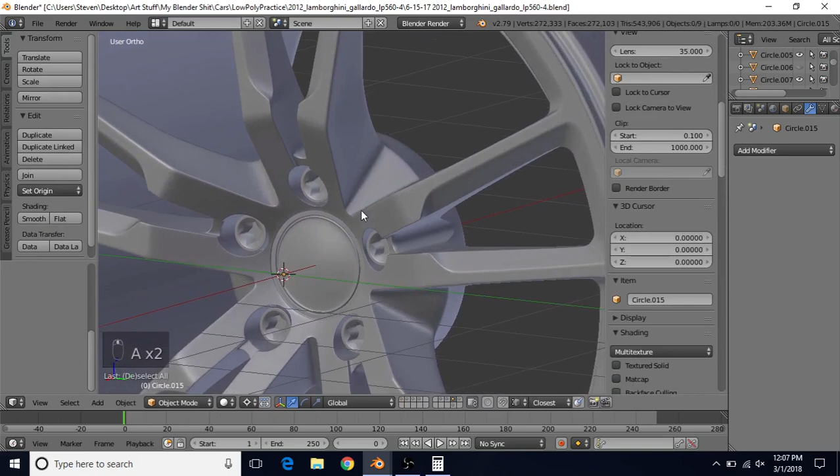That's going to be it for this part. Just go to File and Save.